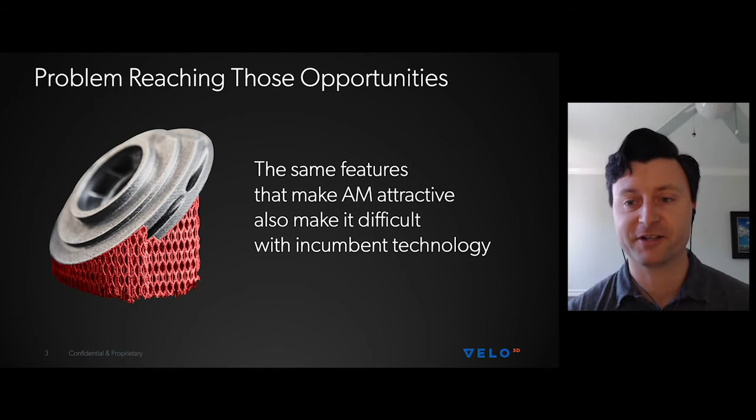This is a really good example of a part that is often no-bid. A contract manufacturer will say this part, getting it to the final customer requirements, is just too complicated to be worth the trouble. There may be too much risk or workflow complexity. Or they do bid on it, and from a customer's perspective, it's just entirely too expensive to make sense with metal additive manufacturing.

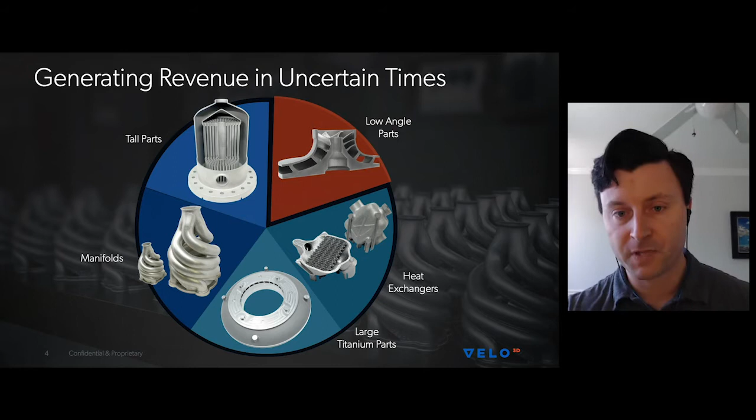Just to rehash a little of what Velo3D really built a lot of our business on: low angle parts are a critical limitation of incumbent technology. Shrouded impellers, as boring as they might seem, are really, really important, and they're found in applications through almost all of industry. So if you can make good shrouded impellers, they are really an ideal part for metal additive manufacturing.

The problem with these geometries is that you have complicated internal flow paths, often with a shroud that is a very low angle overhang. If you're not able to print that without supports, you end up filling the part with supports, which can make it uneconomical to print, or really kind of impossible because there's no good way to get those supports out. The part you see here was printed at Stratasys Direct Manufacturing, one of our customers, for Hanwha Techwin - they'll actually be presenting on this part specifically tomorrow.

It's a really amazing application for supercritical CO2. This is a part that will spin at very high RPMs. They needed to do a lot of material characterization in order to have confidence in it, and then to be able to print it in a way that actually made sense.

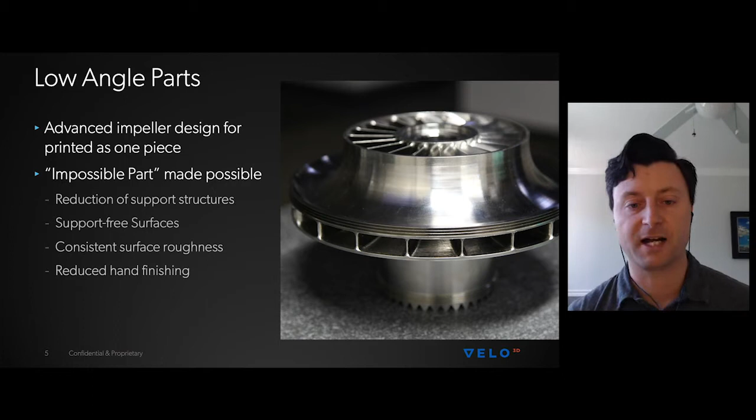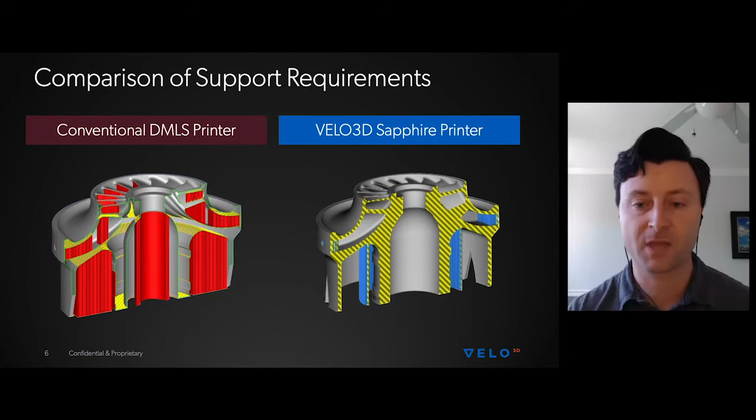But low angle parts are not the only thing that we do well. We wanted to emphasize some of these other applications because they're also very challenging parts that, if you can print with confidence, let you really expand the applications you're going after as a contract manufacturer. So the next is heat exchangers.

We've been working with a company called PWR out of Australia, one of the preeminent heat exchanger design and manufacturing shops in the world. They did a lot of testing of different technologies to arrive at the final conclusion of purchasing a Sapphire printer. The reason was that we were able to demonstrate class-leading thin wall capabilities.

So, print very, very thin walls that were liquid tight. That's really important here because in these applications, you don't want fuel mixing with your coolant or water in your oil, or any other cross-contamination through the heat exchanger itself.

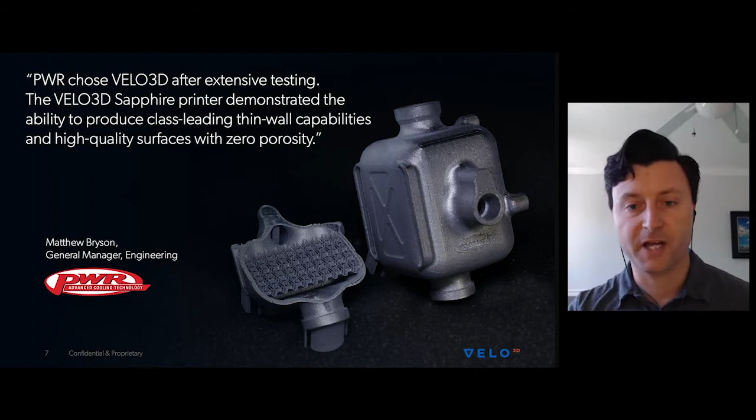The reason we're able to make that is the non-contact recoater. This is a critical enabling feature of our machine that allows us to print very, very thin structures without damaging them with the recoater. Here you can see we have 300 micron leak-tight paths in a number of different orientations, spanning all of the angular sweeps. The fins themselves are down to 170 microns - incredibly thin. They give PWR the performance they really need to be an industry leader in heat exchanger design and manufacturing.

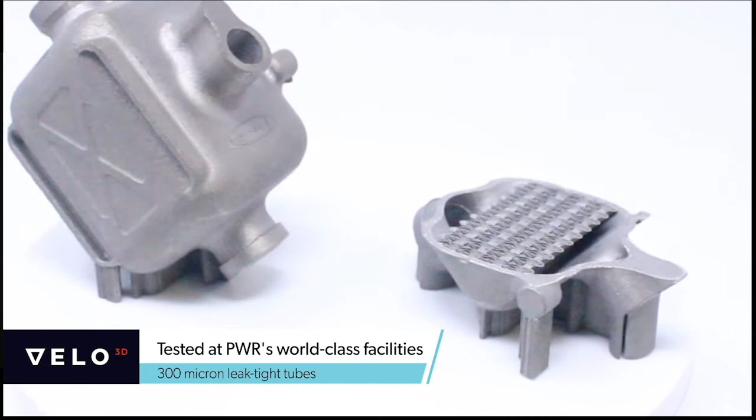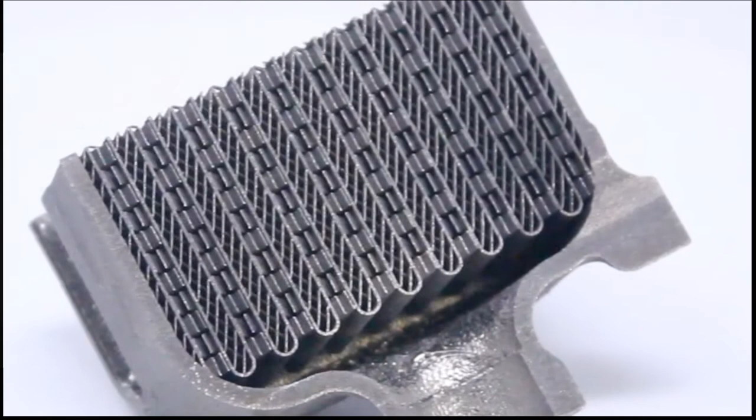So this is a really great example of how the Velo machine architecture can allow contract manufacturers or even OEMs to print parts that otherwise would be very good candidates for no-bidding on, just from the challenge and the potential yield loss of printing these parts leak-free.

One of the categories I mentioned at the beginning was large titanium parts. This may not seem like an obvious candidate for passing on an RFQ, but anybody who's printed titanium, especially in laser powder bed processes, knows it has a tendency to crack. So if you're printing large titanium parts, or parts that have thick sections merging into much thinner sections, the part, if not treated right, will actually tear itself apart.

Before you can remove it from the build plate, you'll often have cracks going through the entire part, and this can be a real problem from a yield perspective. A lot of times we run into contract manufacturers who look at a geometry like this and say, thanks, but no thanks. I know this part will cause me a lot of headaches, and I may end up underwater on it by the time I deliver, just because of that challenge.

Velo 3D has developed a way to print titanium in our laser powder bed system such that we don't get cracking. We've reduced the cracking probability to the level that you can print a part like this without concerns. This part was actually printed successfully the first time, and this is a picture of the machined part at the end of that first print.

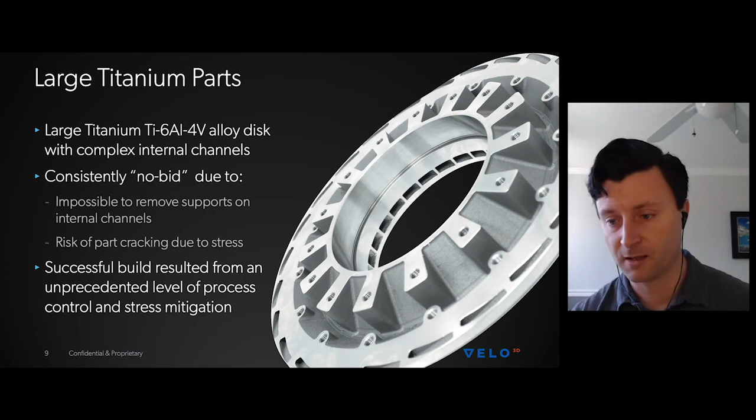The next category is manifolds. Manifolds are essentially a part with internal fluid passages that connect in different ways. Here we have a picture of an injector - this is a rocket engine injector, which at first glance may not seem like a great candidate to describe manifolds.

But one of the most important things about this injector, designed and made by Interstellar Technologies, is that it's a monolithic injector. As far as I know, this is one of the only monolithic injectors that's been produced and hot fire tested. That's really important because they've taken all of the manifolding that would normally go on the backside of an injector and integrated it so it's all printed in a single piece.

While you're just seeing the injector face in these pictures, what's going on behind it - which is export controlled, so it can't really be shown in a presentation - is a lot of really amazing design work around manifolding to get the fuel and oxidizer to the injector face in the right manner.

This was printed as a single piece. Interstellar printed one on a traditional DMLS system and then printed one on the Velo 3D Sapphire system, and found some pretty remarkable improvements from the Sapphire version. They had a 5% gain in combustion efficiency, which, if you're not familiar with rocket engines, doesn't sound like a lot. But 5% is a really remarkable amount of combustion efficiency gain, considering it's the exact same part - there were no design changes between the two.

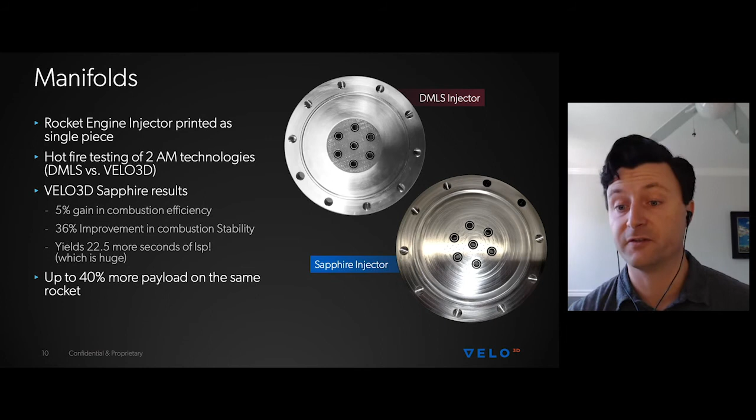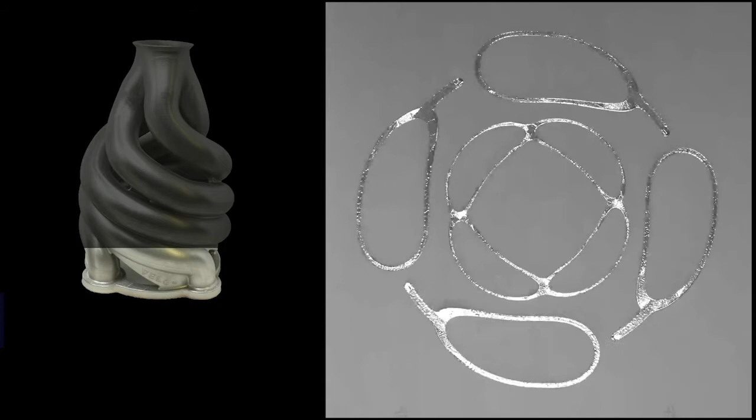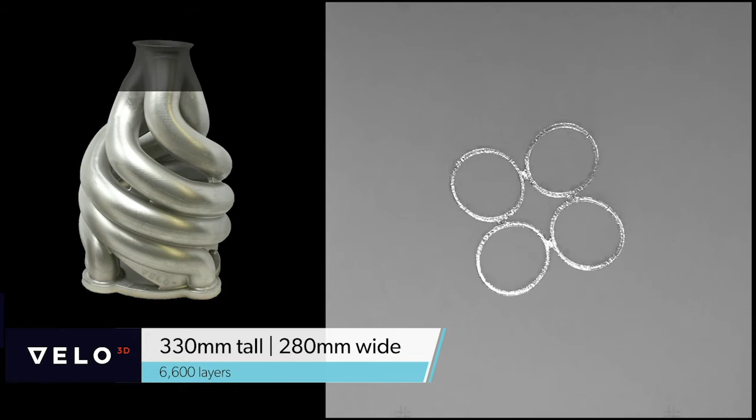To talk a bit more about a more traditional manifold, this is a proxy of an exhaust type manifold. These are tubes that are printed, almost 50 millimeters diameter internal, with no support structure. This gives you an idea of a more traditional type of manifold that can be printed successfully, and these are parts that are relatively common. If you're seeing these come through your shop and you're not keen on printing them with conventional technology, Velo technology can really help bring these into the realm of possibility.

The limit here is also not 50 millimeters - we can print up to 100 millimeter diameter for horizontal tubes without internal supports, and if they're angled, we can go quite a bit bigger than that. So there's a lot of geometries that are now really good candidates where you don't have to remove supports from the internal diameter after finishing printing.

One other compelling aspect of this part is that it's very tall - as shown here on the right, it's 13 inches tall, nearly the full 400 millimeters of our Sapphire system build height. Tall parts are another class of parts that are traditionally somewhat risky to bid on, because printing tall parts can take a decent amount of time, and in that time you're more prone to failure.

Not only that, but a lot of the existing machines, some of the incumbent machines, are really not designed to print tall parts. So there are some risks associated with things like calibration drifting of the optic system, or the recoater coming into contact with the part. Some systems even don't have enough powder in them to print their advertised full Z height, so you'll get about three-quarters of the way through a part and then have to stop the build, add more powder, and continue. In a lot of applications, that's not acceptable.

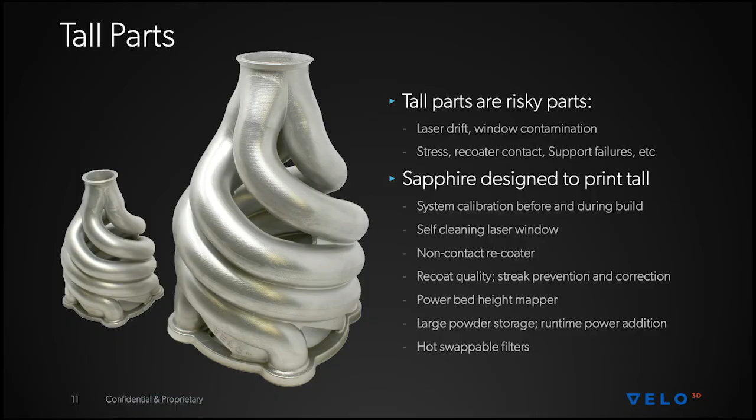It's a dual laser system, two 1-kilowatt lasers. One of the things we've released, and that I was talking about in the interview with Knut Godwin, is that we have customers who've ordered our new 1-meter Sapphire. This is the Sapphire 1MZ, which we'll be delivering to the first customers in the 4th quarter of this year. It takes the current Sapphire system and stretches the Z height to build a full meter tall, almost 40 inches in height.

It has the same process as the current Sapphire, the same in-situ calibration, and all of the same metrology and process control. So you have the same confidence in the parts you get with the current Sapphire system, just at a much higher aspect ratio now.

We're seeing a lot of really interesting applications in oil and gas, in rocket engines, and some other pretty interesting components that really aren't possible to build on current systems.

One of the other things we wanted to mention is that this is a production system, not a custom machine. This is something we're offering as a standard product offering. So now if you have a customer looking for these very tall parts, there's an off-the-shelf solution from Velo3D to actually print them.

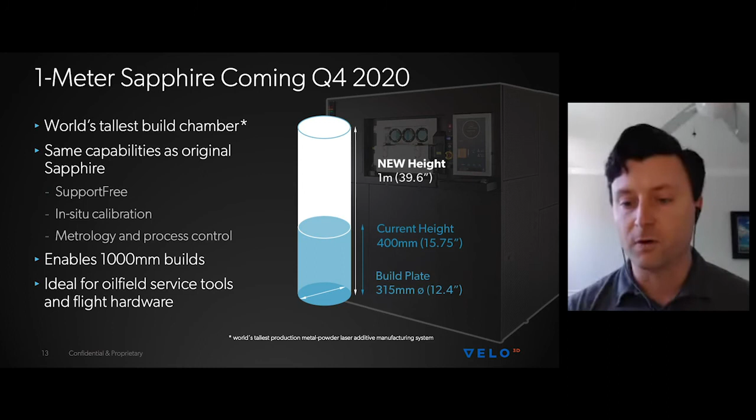I hope this has served as a good overview of the ways that Velo3D and our support-free technology can help widen the application space and potential market of parts for contract manufacturing customers. Also, if you're an OEM, it's really important to consider contract manufacturers with Sapphire systems as potential vendors, because they will likely have much better confidence printing some of these more challenging geometries and can give you the parts you're looking for at the end of the day.

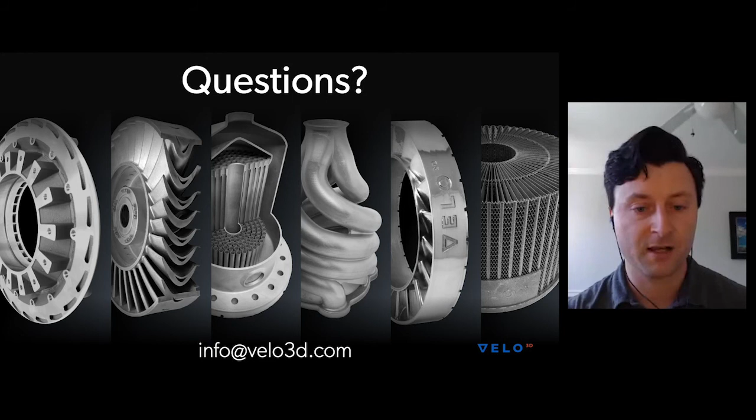All right, yeah, so we have quite a few questions for you in the Q&A. First one: since Sapphire systems can adapt parameters based on the geometries, will there be any effect on productivity, like build rate? Also, what's the surface roughness that can be achieved at low angle surfaces?

So for the first question, there's definitely different processes that run at different rates. Your core process runs at a much higher rate than, say, a contouring process, if you're looking at volumetric build rate. So there are differences between the different processes in terms of build rate. One important thing to mention is that when building very low angle surfaces and geometries that incorporate those, the build rate drops a little bit, but it doesn't drop dramatically. That's really important if you're looking at parts that people claim have been built with laser powder bed at very low angles.

Make sure to look at the throughput, because one of the tricks you can play is to slow it down so that you're printing incredibly slowly. You can start to get away with some of these geometries, but it's just not economical to print if that's how you're actually approaching it.

On the second question, for a very low angle surface, if you're looking from like 10 degrees down to a 0 degree overhanging surface, our surface roughness there is probably between 10 to 15 micron SA in terms of the actual measurement.